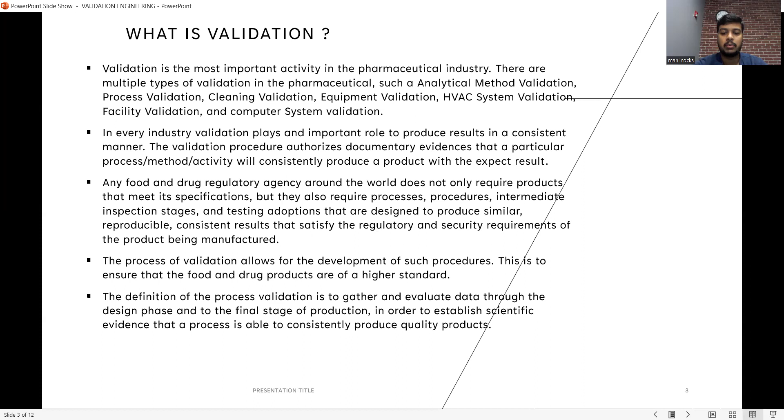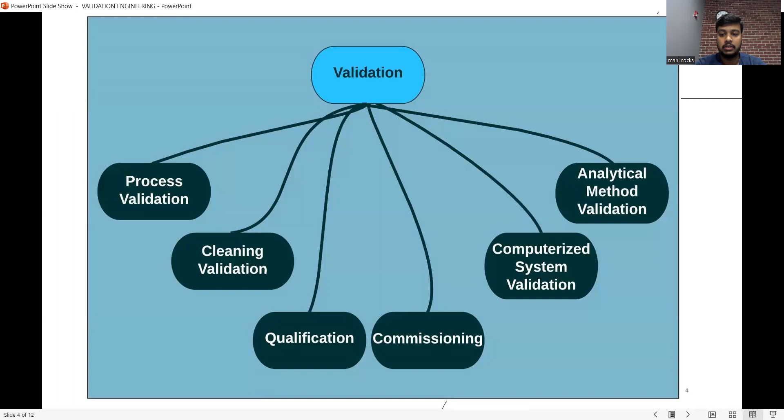So as I told you earlier, there are different types of validation. These are process, cleaning, qualification, commissioning, computerized system validation, and analytical validation. There are some parameters which need to be followed during the validation process. Among them are accuracy, precision, reproducibility, repeatability, specification, linearity, range, limit of detection, and limit of quantitation. The major parameters to be followed are accuracy and limit of detection.

So let's say for accuracy, we need to define the lifetime of a medicine. So we need to mention the expiry date on a medicine, and we need to mention the chemicals and the complexes used in the production of the medicine.

So, limit of detection. After producing a tablet or a drug, we find the limit of detection by placing it in a machine at the lowest temperature and the highest temperature so that it can survive the regular climatic conditions in all types of regions throughout the world.

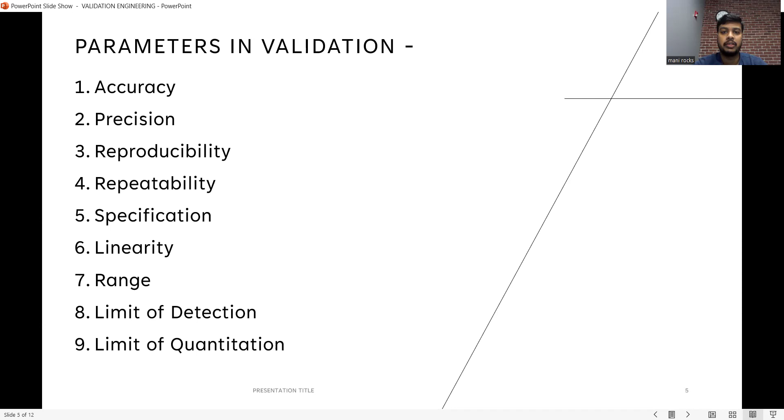So before starting the production of a medicine, the basic first step is to do the cleaning validation. Cleaning validation is a documented setup that provides a high degree of assurance that a particular system or piece of equipment is clean to a predetermined standard and within acceptable limits. So to prevent contamination of a medicine, we need to do cleaning validation.

So for cleaning validation, we use lubricants. We use different types of liquids so that they can clean the small microbial particles also. Pharmaceutical products are contaminated by a variety of materials, including lubricants, airborne materials, preparation residues, and microbes. So for example, how contamination happens.

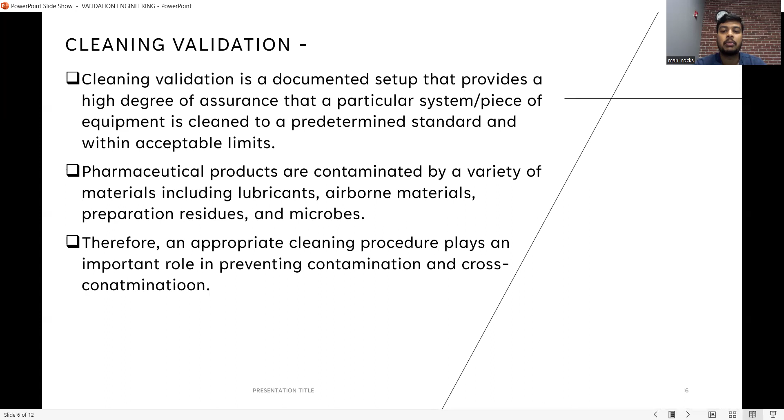The previous batch would be different from the current batch of the production of a medicine. So if the cleaning validation is not done perfectly, the previous production medicine would get mixed up into the current production medicine, and the medicine gets contaminated completely, so it might lead to a huge loss. Therefore, an appropriate cleaning procedure plays an important role in preventing contamination and cross contamination.

Process validation. Process validation shows documented proof which can provide a high level of assurance that a product will meet all parameters specified by quality characteristics and specifications consistently. So after doing the validation, we give documented proof which the quality assurance team approves so that production can be started for a new batch.

So validation of a process also assures repeatability and decreases manufacturing errors, resulting in a higher level of output of predetermined quality. Process validation can also be classified into four types by the stage where the process is being evaluated: prospective validation, concurrent validation, retrospective validation, and revalidation.

So in prospective validation, prospective validation is an analysis of data gathered through the design and manufacturing of a product in order to confirm that the process can reliably output products of a determined standard. Regulatory authorities like EMA and FDA, Food and Drug Administration, have published guidelines relating to this process validation.

And concurrent validation. In concurrent validation, batches are released for marketing prior to approval of the complete validation package, based on the data of individual batches. It is acceptable where there is low demand of product, low shelf life of product, or a life-threatening shortage of product. It can also be conducted when data from replicate runs are unavailable because only a limited number of batches are produced.

So retrospective validation. Retrospective validation is validating a system that has been operating for some time. There are various schools of thought on how to approach retrospective validation. Revalidation. While validation is a process of collecting and documenting the information about the operating parameters, revalidation focuses on ensuring that the product's quality remains unaffected by changes in the process, machinery, methods, scale up, environment, etc.

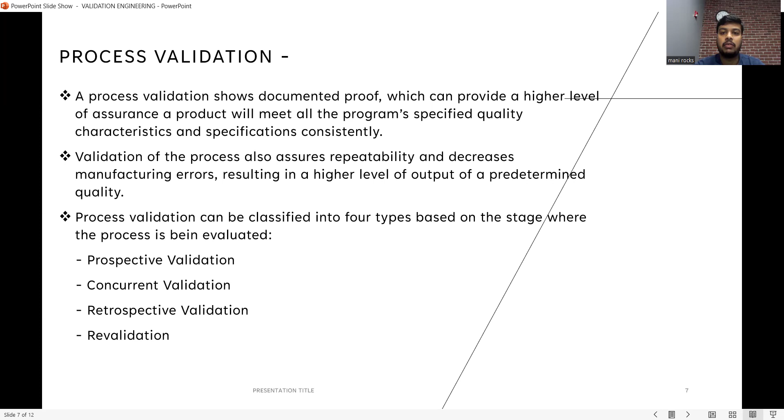So equipment validation. Let's see how equipment validation works. Every equipment has its own lifetime. So let's say a tablet punching machine has a life of punching 10 million tablets, but we have already done the punching of 5 million tablets, so they will validate the equipment: is it suitable for the production of the next batch? Because sometimes we need to continuously work on the batch even for 12 to 18 months. So this is how equipment validation works.

Equipment or instrument validation is a common process for every industrial instrument or equipment. There are three main phases of equipment validation in pharma as follows: pre-validation, process validation, and post-validation maintenance. Generally, there are four types of equipment validation, covered under the pre-validation and process validation phases. So pre-validation is like before starting a new batch, they validate the equipment: is this suitable for the particular batch production or not. And process validation is done when the batch is running, when the medicine is getting manufactured.

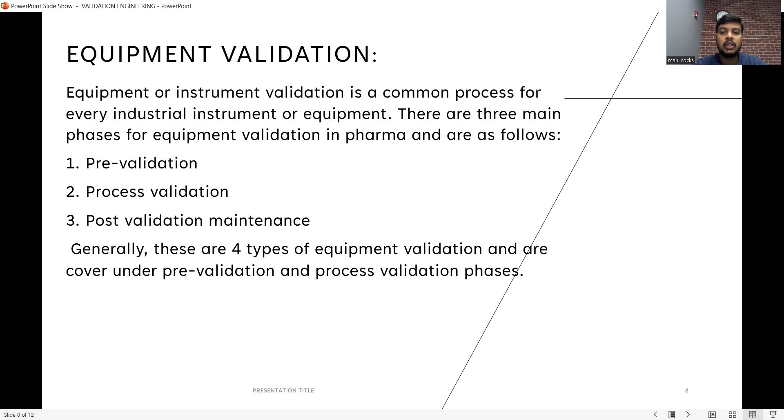Post-validation maintenance. So after completion of the batch, they will validate the equipment and check how much longer we can use that equipment. The four types of equipment validation are design qualification, DQ, installation qualification, IQ, operational qualification, OQ, and performance qualification, PQ. So design qualification depends upon the equipment we use for the medicine. Let's say we use different equipment for tablet making and different equipment for capsule making. Installation qualification and operational qualification. Operational qualification, we can say, is how the equipment is running during the manufacturing process of a medicine.

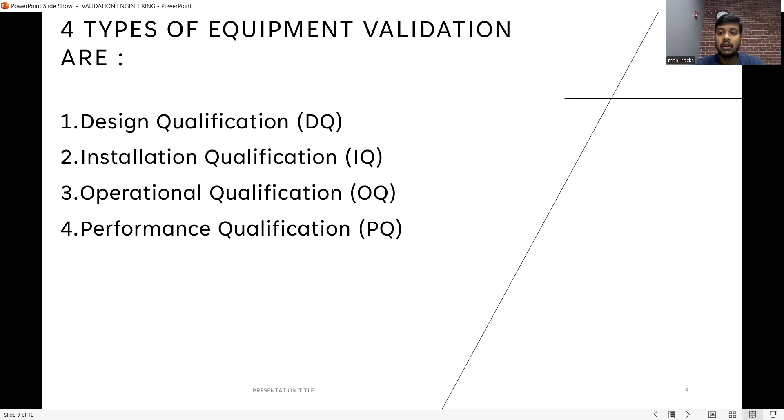Performance qualification determines the low and high peak temperatures of an equipment while manufacturing the medicine. Pre-validation of equipment. Pre-validation is the first phase of equipment validation. Pre-validation includes design qualification, DQ, and installation qualification, IQ. Design qualification consists of user requirement specification, functional specification, operational specification, vendor qualification, and factory acceptance, and installation consists of site acceptance test and installation of hardware and software.

Process validation of equipment. The next phase of validation is process validation. Process validation includes operational qualification, OQ, performance qualification, PQ, and revalidation. Operational qualification consists of functional test and security test. Performance qualification consists of ongoing performance of equipment and specified application testing. Changes in material, changes in equipment, change in packing material, and change in the manufacturing process are part of revalidation. These are the types of validation in the pharmaceutical industry.

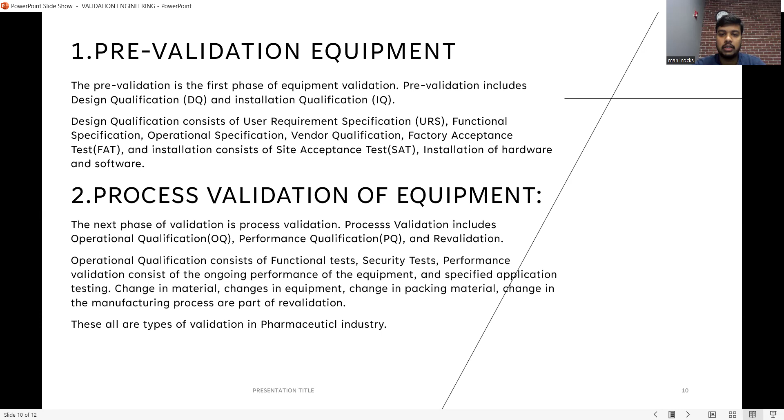So, summary. Simply, pharmaceutical validation is a program that confirms processes, methods, and equipment or systems operate as intended. Ultimately, validation is a program demonstrating the intended use of processes, methods, equipment, and systems.